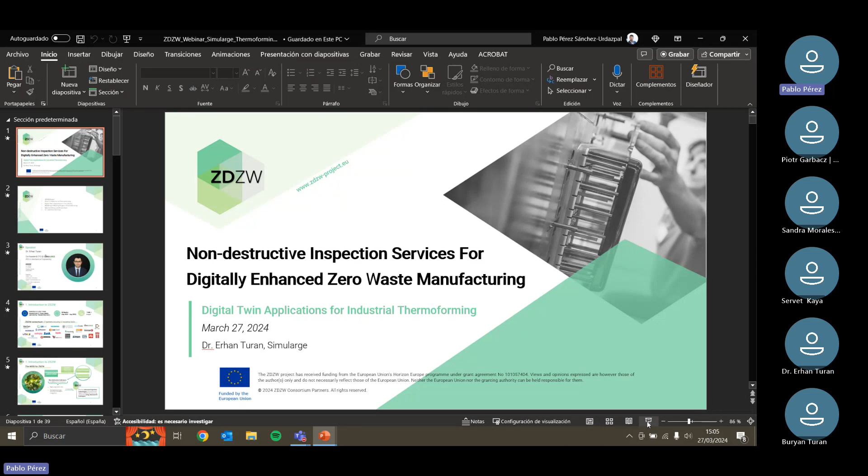Okay, that's great. So well, first of all, let me welcome everyone to the second webinar of the Zero Defect Zero Waste project. This time we're going to speak about digital twin applications for industrial thermoforming. It's going to be presented by Dr. Erhan Turan from Simularge, and from now on I give the floor to you, Erhan.

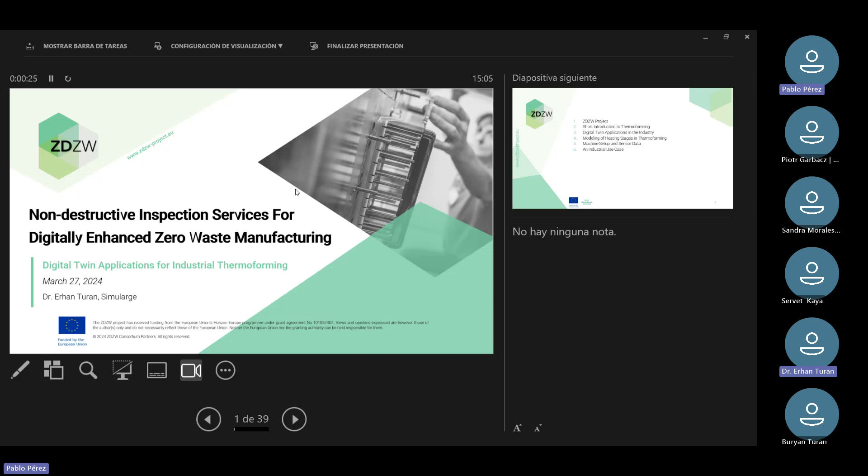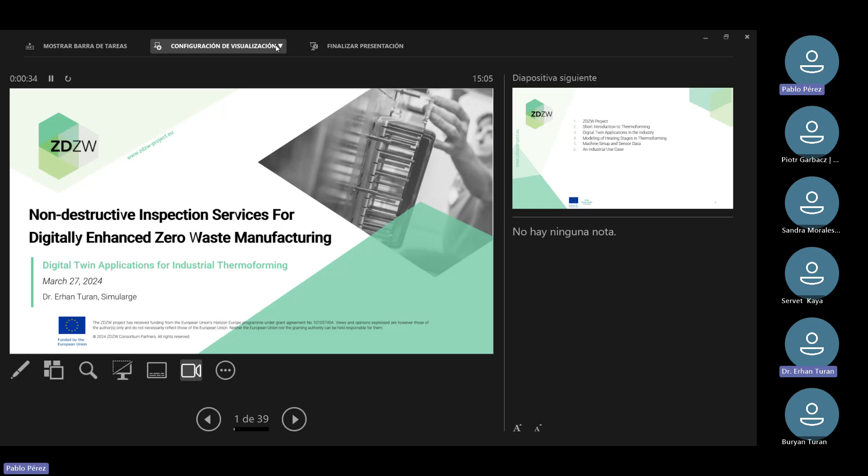There we go. Alright, so today I'll be talking about some digital twin applications for industrial thermoforming, and this webinar will be related to the ZDZW project, which is Zero Defect Zero Waste project, supported by the European Union. This is the short summary of our webinar for today. I'll be briefly talking about what thermoforming is and its application areas. Then a little bit of digital twin will be explained. Then I'll be giving a couple of details about the thermal side, so the thermal modeling of thermoforming in our project. And one industrial use case will be given at the end of this talk.

Now maybe can we move to the next slide please? So let me talk about myself first. This is Erhan, I'm the CTO and co-founder of Simularge. I have a mechanical engineering background. I did my PhD back in 2010 in Boğaziçi University. I've been in ETH Zurich, Bosch Company, as well as GE Aviation. I did a lot of engineering stuff, both in academia and industry. Before joining Simularge, I was focused on developing jet engine designs for Airbus and Boeing aircrafts. And starting from Simularge, our main focus is creating digital transformation solutions as well as digital twins using our own technology. So my interests are generally for industrial computing, numerical science, as well as digital transformation and AI.

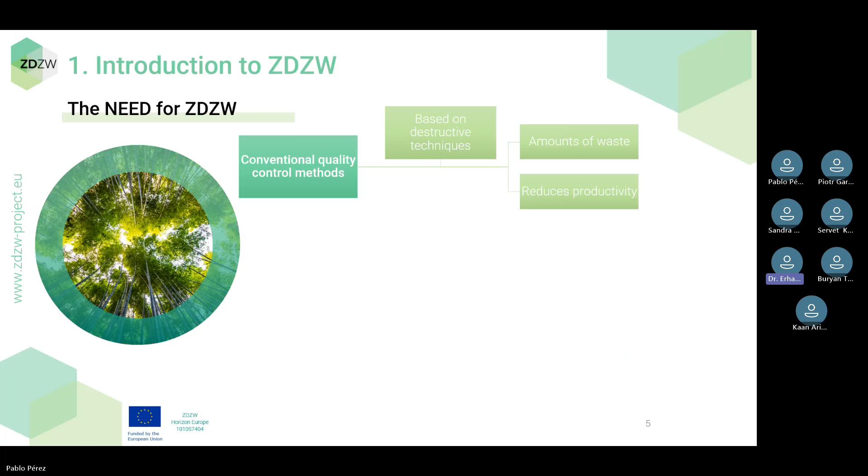So Simularge is part of this community, and the reason that the ZDZW project is initiated is that there are a lot of problems with waste. Typically, waste can occur if there is a quality problem during the production process. If the manufacturing parameters are not set, then we see quality issues. That is one area that, as a project contributor, we would like to help the community with. Another part is when we do detection to understand how defects work, sometimes we do destructive detection processes. The idea is if we can create non-destructive detection algorithms or systems, it will be really useful, because we don't have to waste the part that we are trying to solve.

To address this challenge, there will be a couple of work suites, or inspection suites, created among this project's work scope. Our goal as Simularge is helping the thermal inspection suites, but we also have visual inspection suites or other suites as well.

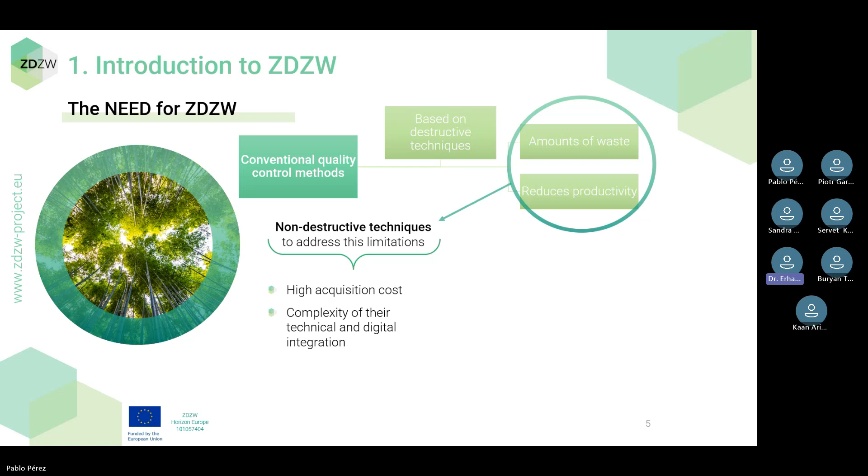Typically, non-destructive testing techniques or inspection technologies are really time consuming. It requires a lot of investment and cost, but we would like to keep it short and give high tech a chance to help this area. Maybe we can move to the next section.

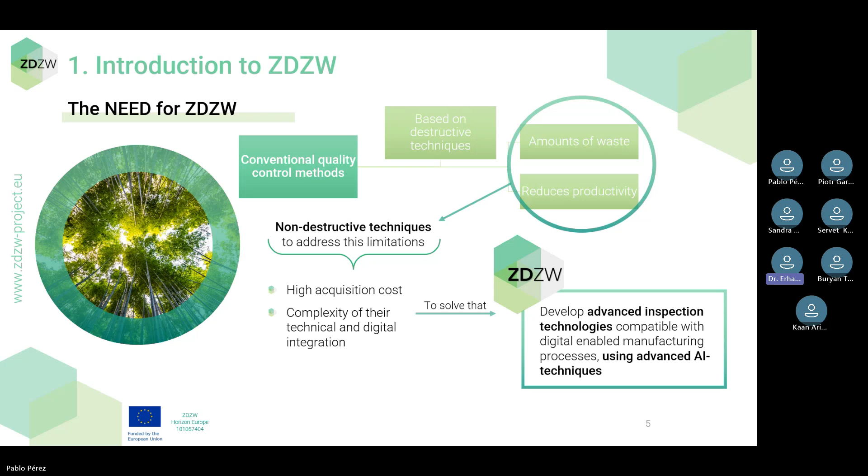As I said before, we will be using advanced AI techniques and an engineering approach to solve this problem.

This is a general overview of the ZDZW project. There are 6 pilots, and all of these pilots will be focused on 1 or 2 inspection technologies. The pilot we're involved with is pilot 2, where we're going to help thermoplastics manufacturing get better using digital tools. As said before, there are inspection suites and process monitoring diagnosis.

We're going to create a digital ecosystem in which project contributors will be creating their own applications, and under a marketplace or general storage area, this will be accessible to all members of the member communities.

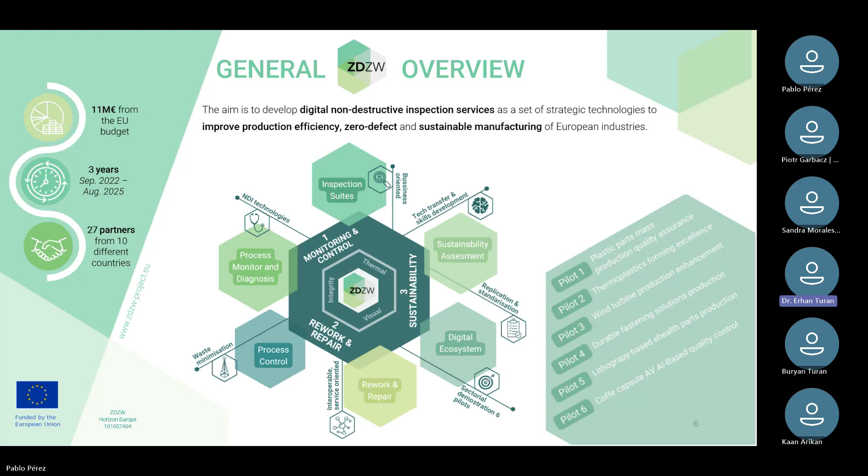So let me talk about thermoforming. Typically, when we produce parts from plastics, thermoforming is not the first choice. Plastic injection or blow molding are among the top alternatives to create parts out of plastics. But the thermoforming procedure also has its own use. In reality, if the pieces are large or cannot really be created using typical plastic injection operations, we use thermoforming. In a nutshell, thermoforming is not a single process.

It has some stages. The first stage is typically heating up the piece so it gets softer and we can give it a shape. The second stage is where we apply a mold under vacuum, or maybe in an open or closed chamber setup. Using this mold, we can give the desired shape to the softened material. Then we wait, which is the cooling part. Our goal in the cooling part is to keep the temperature as low as possible so the shape we gave the material stays as it is. Then we have the trimming process, where we chop off the additional parts.

There are 2 types of thermoforming. The first one is thin gauge, generally used for packaging of foods or similar items. The one that is more of an industrial use case is heavy gauge. It is used in liners, and sometimes even the front section of ATM machines. We can move to the next stage.

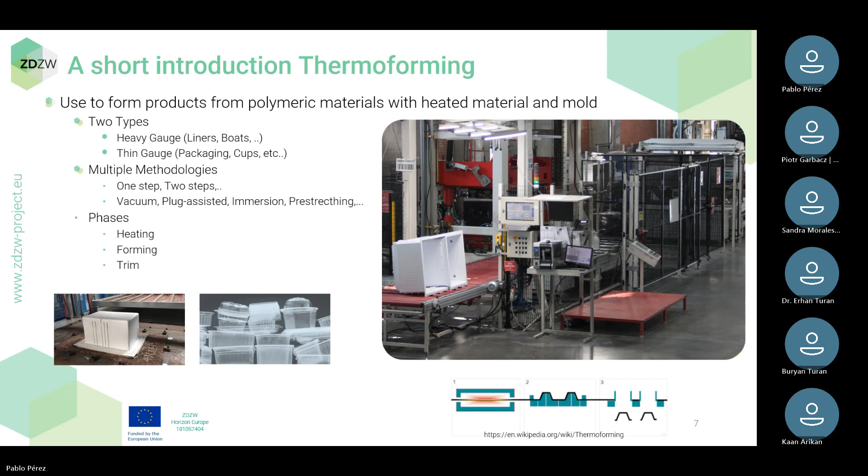Next slide. As I said before, there are a couple of stages of thermoforming. The first stage is where we heat up the material. Our goal is to soften the material—it's a thermoplastic material, which could be polypropylene, polystyrene, or ABS. In a normal heating process, we use electrical heaters, like ceramic or quartz heaters. Using the radiative heat transfer mode, we can apply heat input onto the surface of the plastic sheet. Using diffusion within this volume of the thermoplastic sheet, we can create a higher temperature material.

When it's hot enough, we can move to the forming section. In the forming section, as the image from Wikipedia shows, we apply the mold. The mold can be used within a closed control chamber, where we create a vacuum to support the molding operation, or even in this simple example where we are creating a thermoform-based luggage. You can see it also works in an open environment as well.

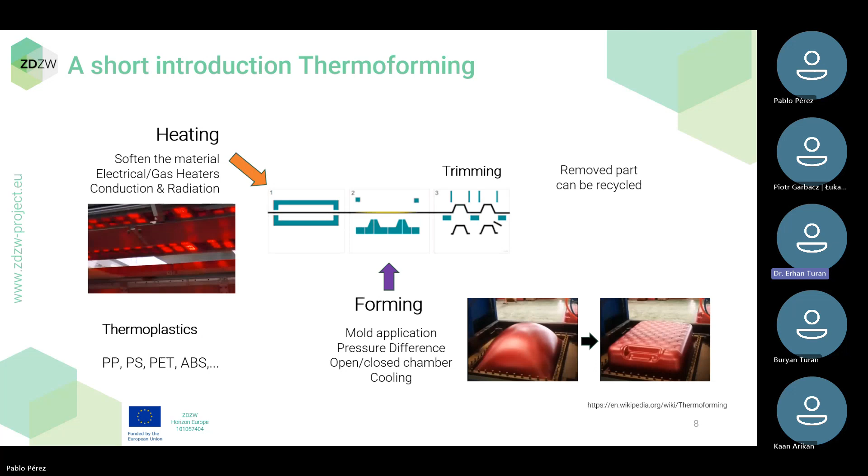In normal conditions, people are not really focused on the cooling section, but during the forming stage, we also need to wait for a couple of seconds, sometimes even a minute or so, to make sure the temperature is below the critical temperature we call glass temperature. At the end, trimming—we remove the additional excess parts from the piece. The good thing is these excess parts can be recycled and reused starting from the initial phases of thermoforming, where we create the uniform plastic sheet. So it's not a waste of material. It is really important. Please, next slide.

Before we proceed, I would like to give a short introduction to digital twins. In a nutshell, digital twin was first introduced by Michael Grieves in the early 2000s. The idea is to create a real live object's copy in a virtual setting. That means if I have this mouse, I would like to create a virtual copy in which all of the motions, all of the actions that I apply on this real device can be simulated in a computerized environment.

So in a nutshell, digital twin is a combination of mathematical modeling, in which we might have chemistry, physics laws, engineering mathematics, and it also involves data. We need to make sure data is collected from the environment for the same part, same workflow, same system that we are trying to investigate. So model alone or data alone is generally not enough to create a digital twin.

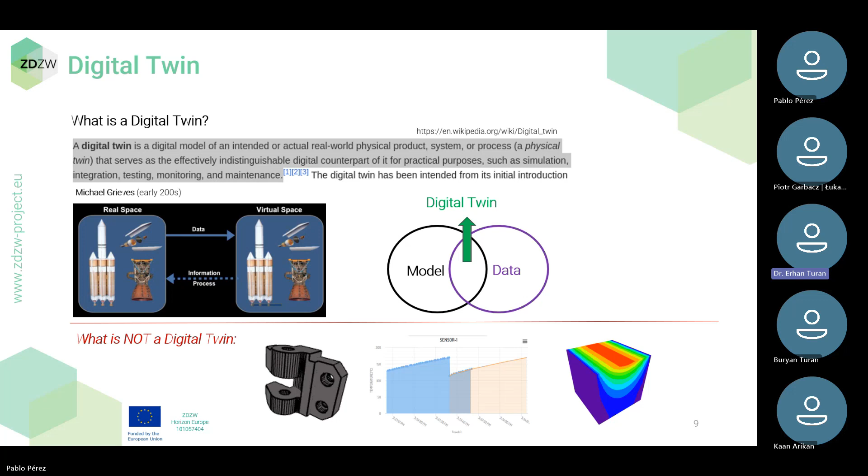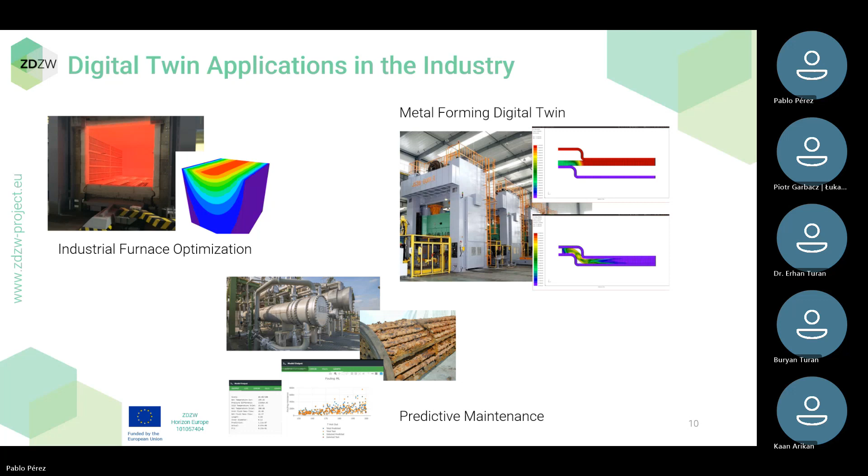Next slide, please. All right, so back to thermoforming. In this webinar, I'll be mostly focusing on the thermal aspect of thermoforming. I know thermoforming also includes the molding stage as well as the trimming stage, but it really starts with the thermal stage of the process. If you know how to control the heating behavior of the thermoforming process, it really helps you to control the quality of the final product.

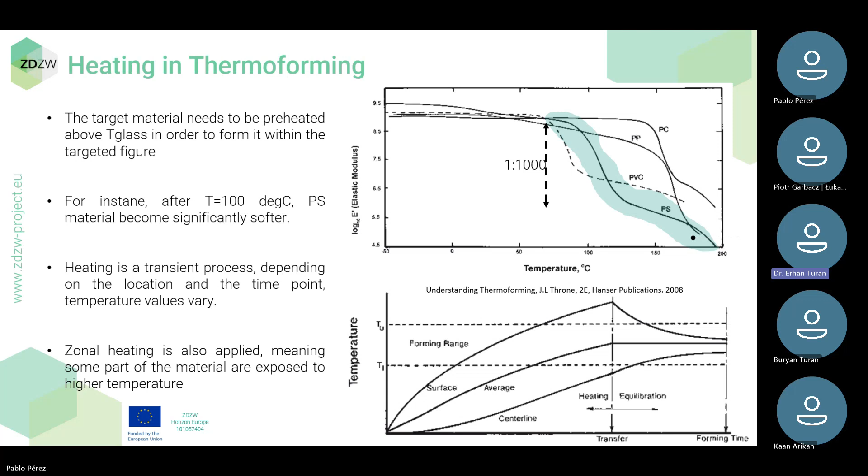On top of that, since the shapes we are trying to produce are not simple shapes, they have a lot of complex features, and some sections need really good control because it's an end-user product. We also apply zonal heating. Zonal heating means some parts of the thermoplastic are heated more than other parts, so we have some hot zones and cold zones, and that complicates the problem a little bit further. Okay, we can move to the next section.

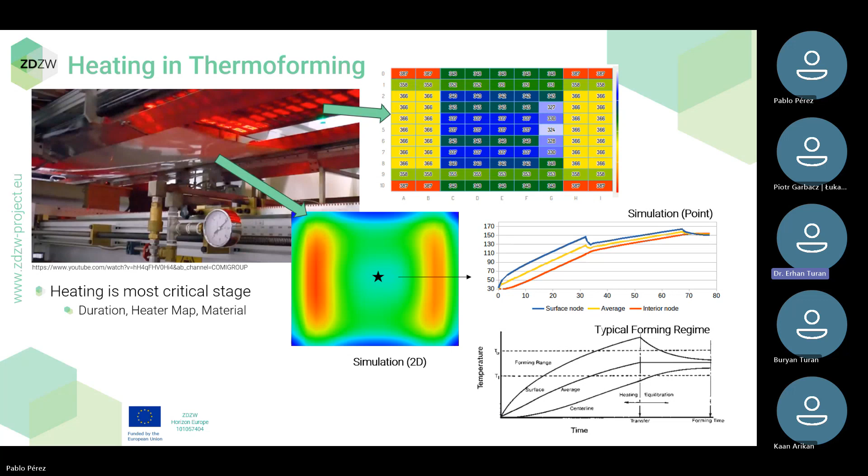And you might ask, why do we do that? I mean, what is the reason to create a non-uniform temperature profile? And the reason for that is when we move to the next stage, we apply the mold, which is a structural forming operation. These hot zones are the location where the mold is initially contacted with the thermoplastic. So we need to make sure where the mold touches for the first time on this material is softer than the remaining part of the material. For that reason, we are creating a non-uniform structure, and this makes the quality of the end product better. Yeah, we can move to the next slide.

Within the thermoplastic, which is thin, by the way, at most it could be like 4 millimeters, 5 millimeters, 6 millimeters at most. Even if it's thin, there is also diffusion within the body. That means even if we apply heat on the surface of the thermoplastic, within the plastic sheet, conduction is occurring. So I don't want to go too much into the details of the physical equations, but what is critical here is that the radiation effect on a plastic sheet is nonlinear because the equation itself has a power of 4 of temperature, and the effect of conduction is linear.

So in a nutshell, when we do zonal heating as well, meaning some of the heaters are hotter, some of the heaters are colder, adding the effect of nonlinear radiation, this problem becomes really complex. So for that reason, we apply modeling, we apply finite element analysis, we apply some integral rules to make sure the temperature on the surface can be calculated. And this is the core of our digital twin solution. Next slide, please.

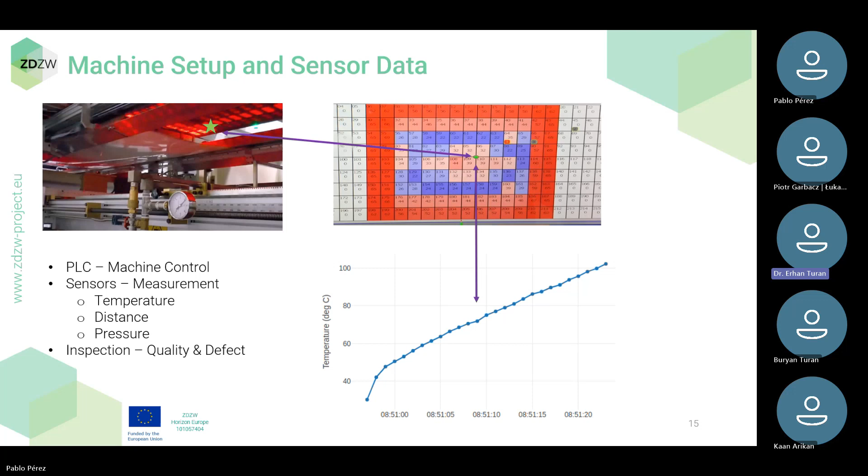We can move to the next slide.

All right. So this is the section where I'm going to talk shortly about an industry use case, and it's the Arçelik company. It is one of the largest appliances companies in Europe, and generally Europeans know the Beko brand rather than the Arçelik brand. Arçelik is mostly in Turkey. So this is a really huge company. They have almost 7 billion euros revenue every year. They have more than 40,000 employees. And as far as I know, around 1,000 of them are just in the R&D center.

And in this webinar, I'll be focusing on Arçelik's refrigerator plant. This refrigerator plant is located in a city called Eskişehir, and it is one of the largest refrigerator plants in the area, as well as Arçelik's largest refrigerator factory. This factory is using almost 50% of all the electricity for the thermoforming process.

You see, if you can improve the thermoforming process, you're not just going to help the company control their cost, it'll also support the sustainability goal of the company, because if you can reduce the amount of electricity usage, you can also reduce your carbon footprint. Sustainability goal.

Can we move to the next slide, please? All right. Oh, can you go back? Yeah, sorry. No problem. Appreciate it.

So in total, Arçelik has 8 refrigerator plants, and the largest ones are in Turkey. Here they are producing the liners. Liners are the part you see when you open the refrigerator door, these white walls, right? This is a refrigerator liner, all these white walls, and it is produced using the thermoforming machine.

In total, Arçelik has 32 thermoforming lines, and that was my last number. They acquired a couple of new factories, so probably this number is even higher now. But what is critical here is that they are using almost 20,000 tons of plastics every year. That is tons, right? And that means you use a lot of raw material. If your defects can be controlled, then you reduce your use of plastics. If you can control the heating process, then you can control your electricity, right?

And here we did some early tests with one of Arçelik's thermoforming lines, and you see on the left we collected data from the PLC. We also created an environment in which we can simulate how the temperature is occurring in our model. And you see 95% accuracy is achieved using our digital twin, where we created a calibrated system.

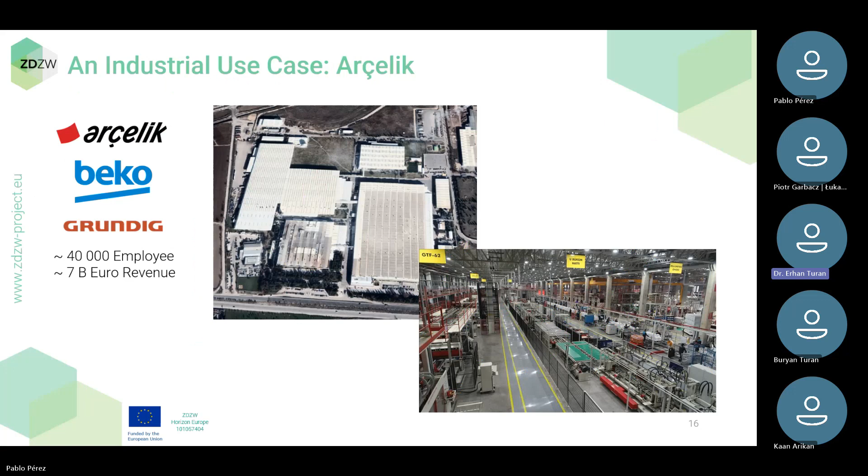And here, Pablo, can I ask you to go back a couple of slides? I'm going to tell you when to stop. One more, please. One more. Yeah, here. Okay, heater.

Yeah, this one. Remember this curve? So this curve on the left-hand side has a particular shape. It's like a parabolic shape from the y-axis point of view. And if you can calibrate the critical values on this curve, you have the option to control the temperature distribution on the heater array. That also means the temperature distribution on the thermoplastic sheet.

Using our data from the machine, we were able to capture the behavior of the heater elements. And using this input, our digital twin created a couple of iterations. And at the end, a calibrated model just for that production line was created.

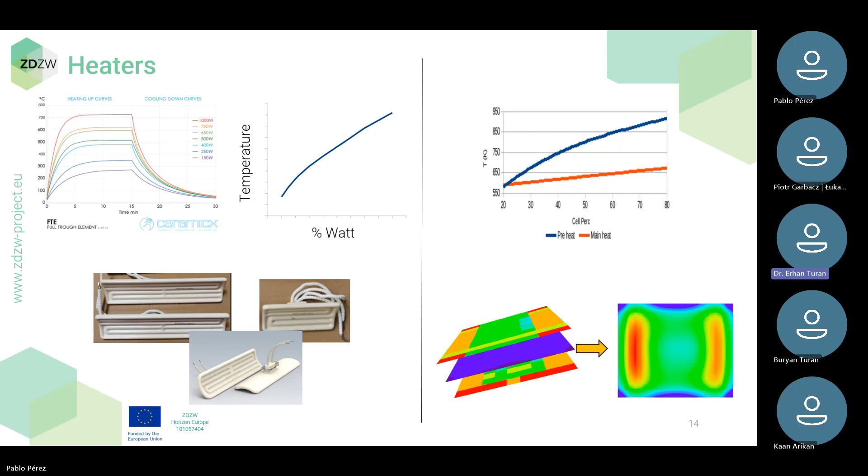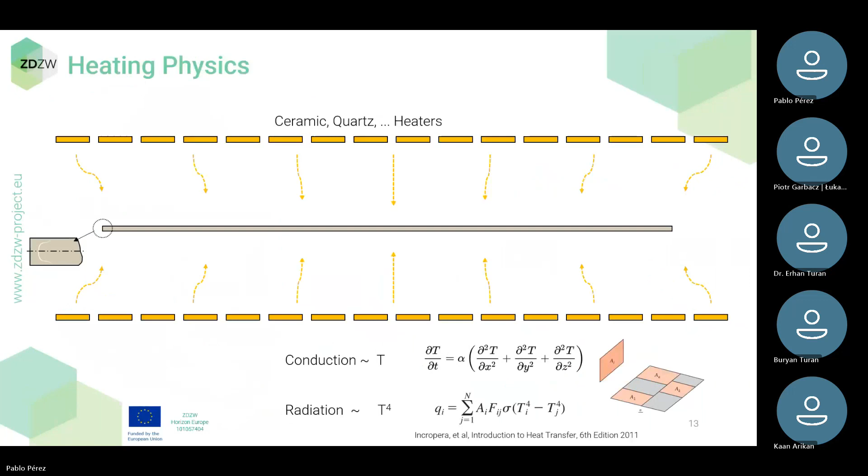Now you can go to the slide we left. Yeah. No. Like 17. I guess it was 17.

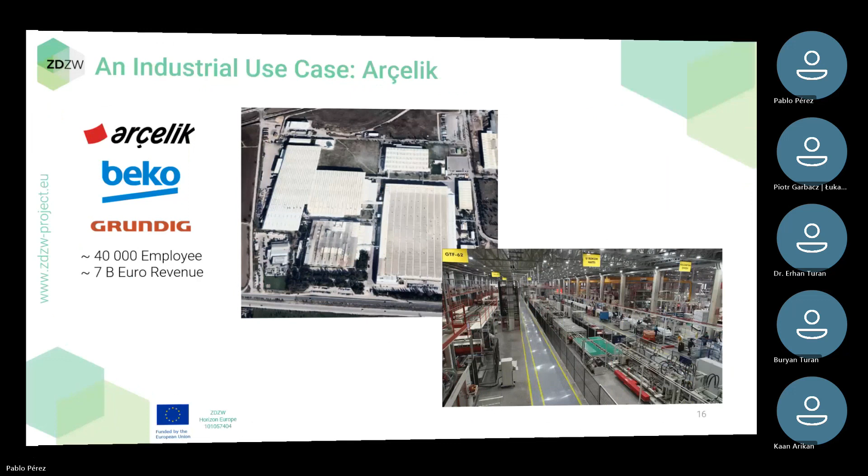Using that, we were able to create a characteristic behavior for the heater elements. So at the bottom center, you see a couple of blocks, like 200 at the top, 200 at the bottom, which I'm calling temperature top heater and bottom heater. These are calibrated using the data we collected from the machine. So we initially assume a curve, a characteristic curve. We did our radiation, conduction, finite element assessment just to create the initial result.

Then we created a feedback loop. Here we optimized our output based on the input from the PLC of the machine. And at the end, the right figure is where we get a two-dimensional image of the real piece, which is 95% accurate at the point of the sensor data. And this is really important. What you are seeing here on the right-hand side is not infrared camera data. It's not sensor data. It's just direct output of the digital twin.

And using this, we can now do a lot of stuff. If you have a different targeted temperature profile that you would like to achieve, you can create a reverse heat transfer problem to assign different values to different heater elements. Or let's say one of the heaters is broken, or maybe a couple of them are broken, and you need to change them. You see, it is really hard to stop a production line because you need to create a refrigerator, right? Here, digital twin can help you to compensate the error.

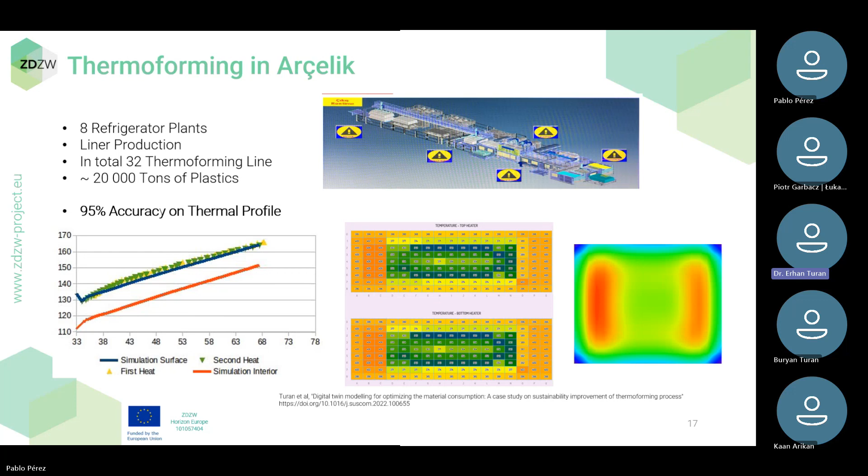All right. So this is just the thermal side of the thermoforming process. In reality, the material is important because this is a thermoplastic material. And if it is softened, it can be hyperelastic / viscoelastic. So it is, unfortunately, also a non-linear material because of its polymer content. So material behavior can also be incorporated in the digital twin, especially for the molding stage, where we really give the final shape of our desired product.

So in the molding stage, the pressure sensors can be incorporated in the digital twin because using the pressure values, we can control how much vacuum we are creating, how much bubbling we can create on the system. Since now we have an understanding to improve the molding, you can go to your initial product design and maybe even improve your mold design, right?

As I said before, cooling is also an essential part of the molding stage because we would like to reduce the temperature below the glass temperature so the shape that we give to the product stays the same. And there, using special cooling channels, you have the option to reduce the cooling time as well.

And finally, I talked about it a couple of times during the webinar. The sustainability aspect is also important. When we reduce defects, we help the company to control their cost. We help the company to reduce their raw material and electricity usage and their consumption. And that has a direct implication on reducing carbon footprint as well. So this is all from my side for today.